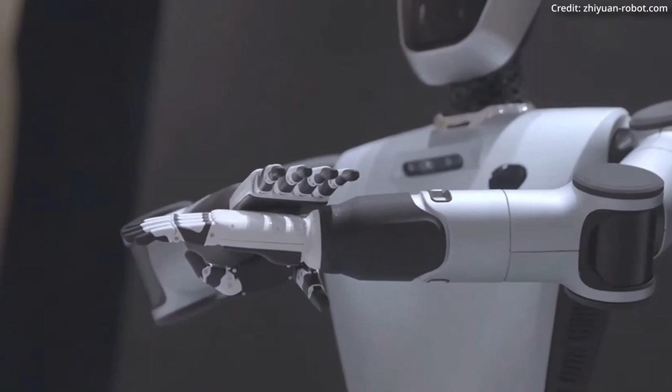In a robotics breakthrough, Chinese company AGI-Bot has unveiled RAISE A1, an advanced humanoid robot that's bringing us closer to generally intelligent android assistants. These machines aren't just aesthetically human-like, but they also boast capabilities that could revolutionize how robots and humans interact.

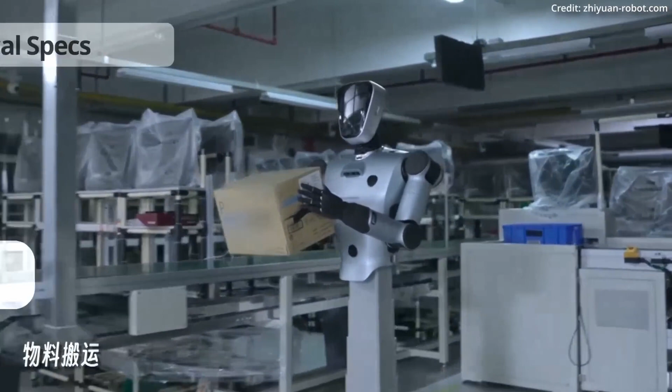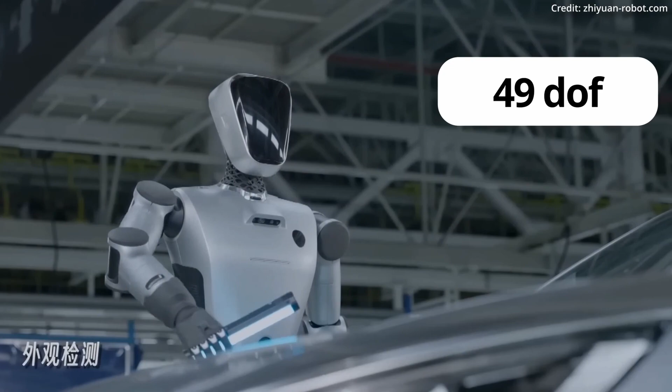At 175 centimeters tall with a weight of 55 kilograms, RAISE A1 cuts an impressively lifelike figure, but even more impressive is its robotic musculature. With an incredible 49 degrees of freedom, it can potentially mimic the fluidity of human movement better than any android before it. And it's not slow either, as the RAISE A1 can walk bipedally at over 7 kilometers per hour.

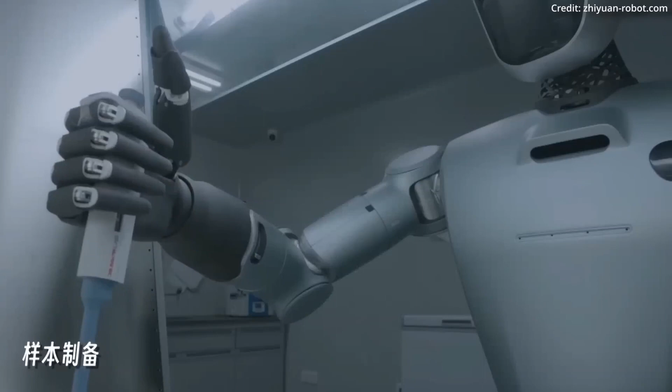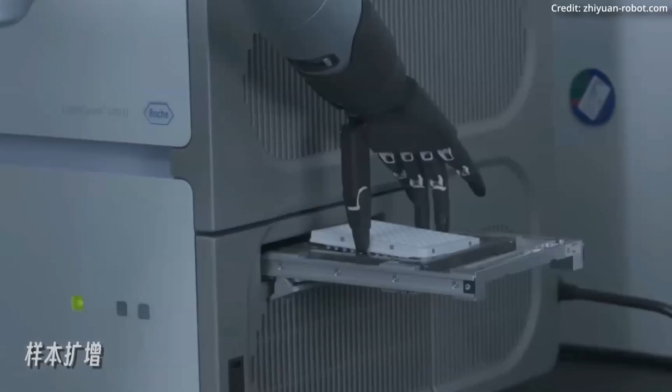While lifting 5-kilogram loads, what truly separates this robot from the pack, however, is its next-generation artificial intelligence. While remaining tight-lipped on specifics, AGI-Bot has strongly hinted that RAISE A1 leverages several massive language models with tens of billions of parameters. This cutting-edge AI allows it to understand and communicate with human-level eloquence while tackling cognitive tasks with ease.

The researchers say they've unified the latest advances in robotics and AI to create an android that's markedly closer to the intelligent machines of science fiction, including innovative hardware like the liquid-cooled PowerFlow actuators, enabling the robot's impressive agility.

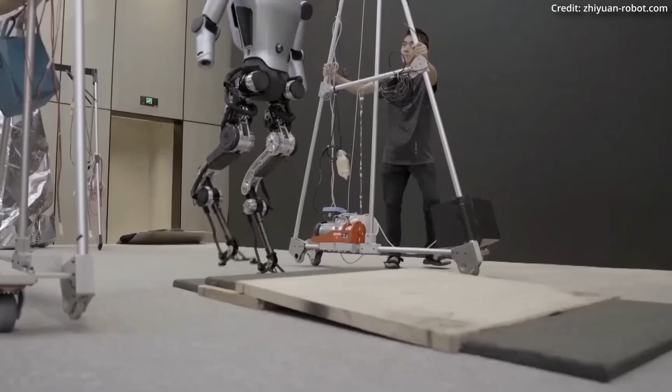But RAISE-A1's true potential may also lie in its modular design, as this versatile android can hot-swap components like hands, wheels, or legs for totally different use cases, including assembling other robots, aiding the elderly, or even babysitting. And with this kind of modular flexibility, it could finally make human-robot interaction affordable and ubiquitous.

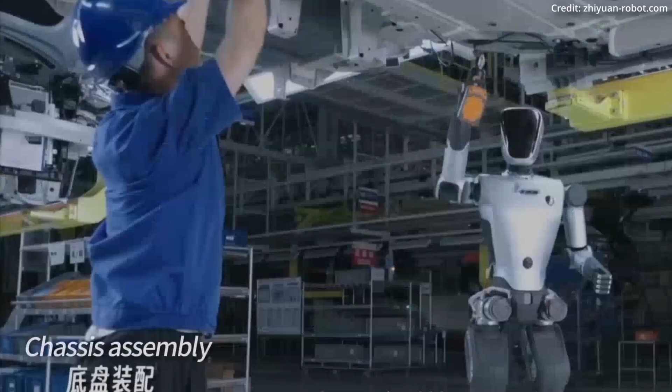Furthermore, AGI-Bot has bold plans to commercialize RAISE-A1 by the end of this year, first in industrial manufacturing, before potentially introducing it as a home assistant or robot valet. And if they deliver, it could be the turning point that brings humanoid robots out of scientific labs or test settings and into our everyday lives.

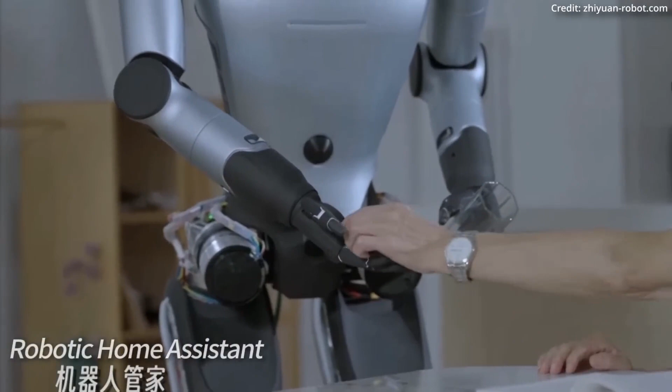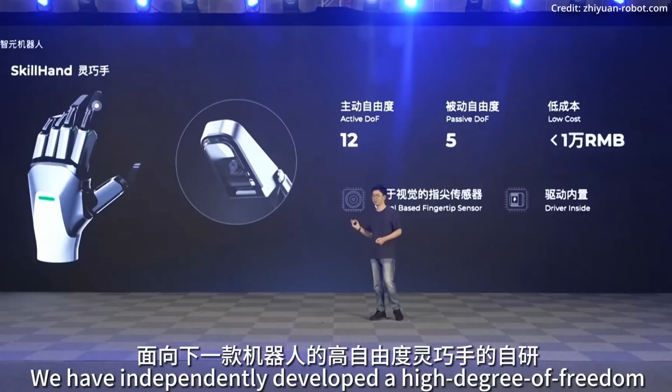Another key innovation allowing an even wider array of versatile use cases is RAISE-A1's modular SkillHand system. This dexterous robotic hand packs 12 active degrees of freedom and 5 passive ones, with built-in vision sensors for precision manipulation. Yet it costs less than 10,000 yuan, making it affordable enough to be a standard accessory across AGI-Bot's robot lineup.

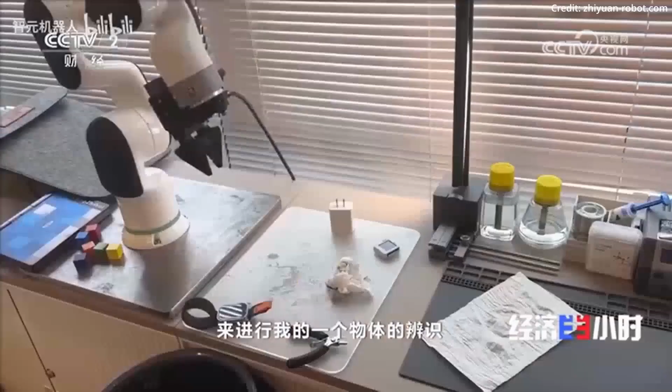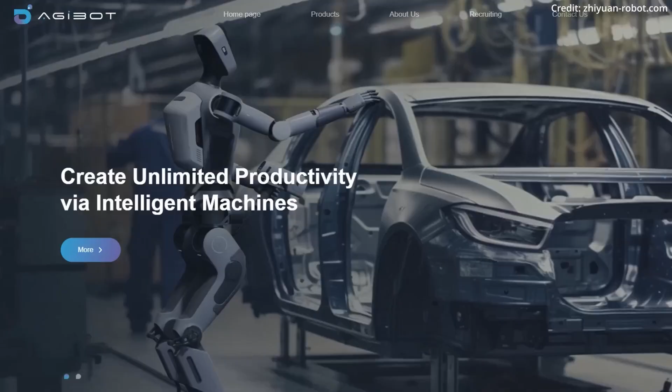But SkillHand's modularity is its true game-changer, with RAISE-A1 being able to autonomously swap out its hand for specialized tools like screwdrivers on the fly. This customizability epitomizes AGI-Bot's modular design philosophy, allowing their robots to morph between bipedal, wheeled, and other forms seamlessly.

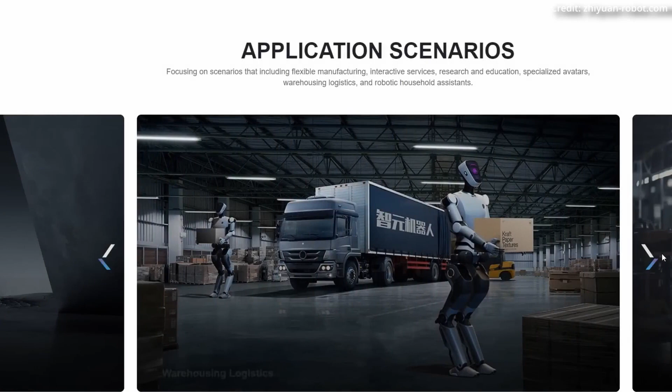But most important is the robot's AGI-ROS system, which is AGI-Bot's unified robot operating system that adheres to principles like lightweight deployment and high scalability, while also providing multilingual interfaces to support major robotic frameworks like ROS. And even more exciting is its soon-to-be open sourcing for community development.

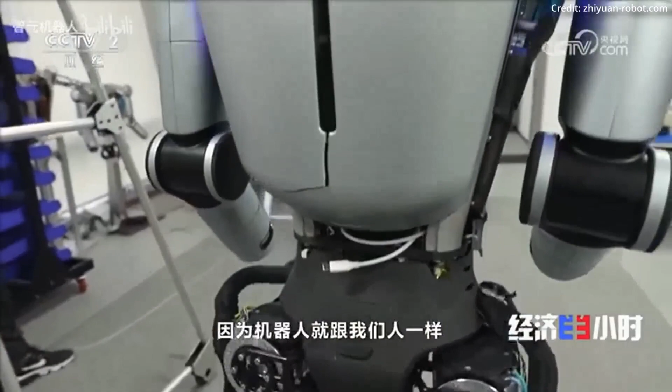However, AGI-Bot understands that advanced hardware and software are just one piece of the puzzle, as the true key to unlocking a robotic revolution lies in its other artificial intelligence models. To this end, AGI-Bot is betting big on enormous language models, with job listings for engineers specializing in systems with tens of billions of parameters.

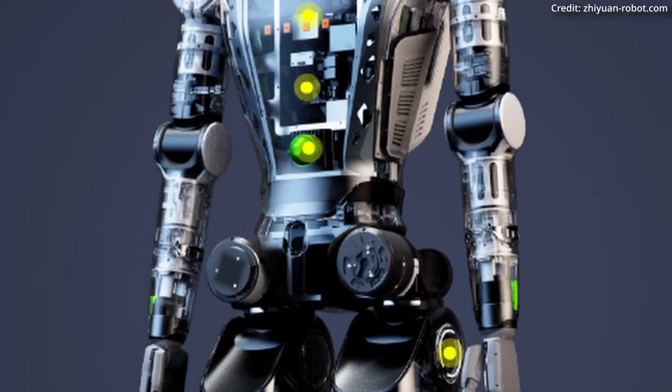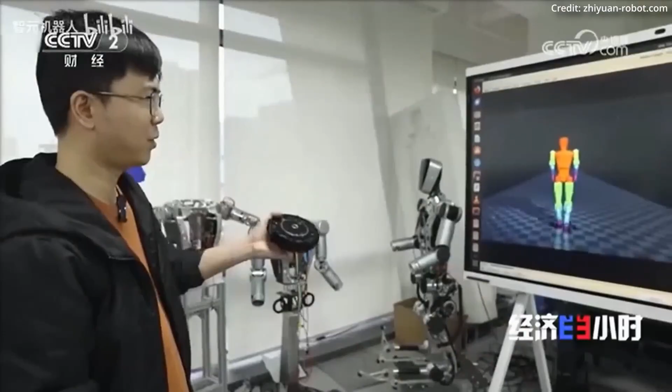Their aim: fusing this cutting-edge natural language AI with robotics to create intelligent, communicative machines that can understand and interact with humans more intuitively. The company sees this union of language models and robotics as an inflection point that will finally allow robots to break free of their industrial shackles and integrate into everyday life.

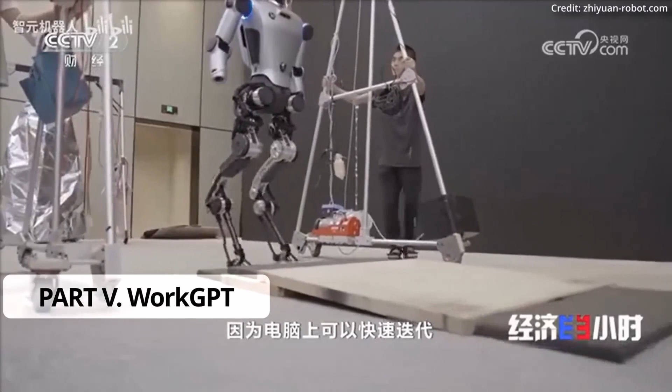And as other big players also invest in android intelligence, the race is on to birth the world's first truly intelligent robot assistant. Furthermore, there's another breakthrough that's underpinning RAISE A1's unprecedented capabilities called the WorkGPT AI system.

By combining breakthroughs in large language models and visual language models, WorkGPT allows RAISE A1 to perceive its environment, comprehend instructions, and autonomously plan actions, allowing it to serve as much more in the near future.

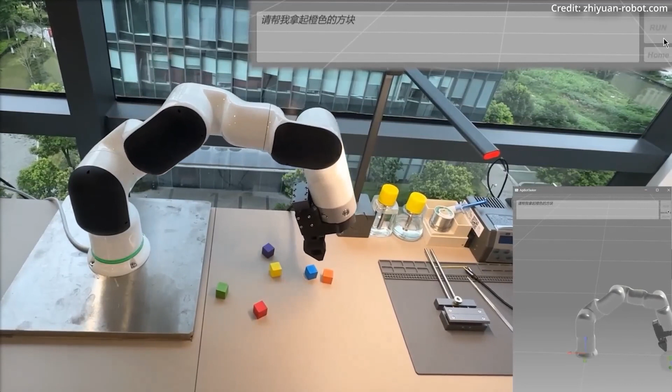And WorkGPT itself is a towering achievement as a language model with tens of billions of parameters that's trained on a vast knowledge base. But unlike typical AI, WorkGPT leverages its capabilities for more of a general kind of intelligence.

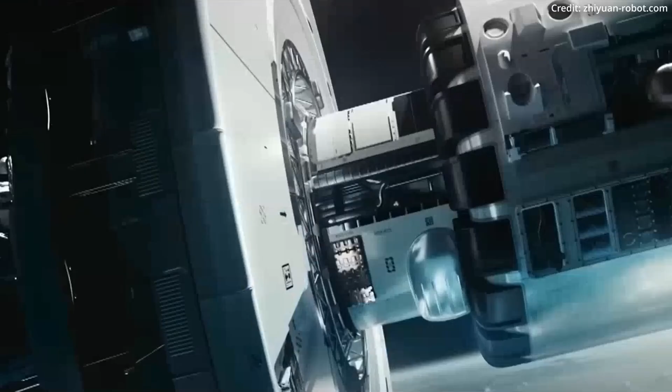In fact, it can even identify objects and concepts without explicit training data by reasoning through complex multi-step operations via what's known as chain of thought. Simply put, WorkGPT gives RAISE A1 powerful comprehension and problem-solving skills that are nearing human cognition.

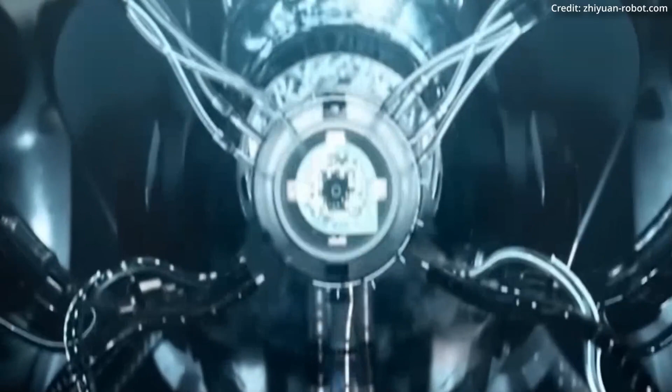And orchestrating these abilities is AGI-Bot's innovative architecture, which is referred to as AI Brain. In terms of its most important duties, it provides robotic intelligence in a cloud-based approach for abstract reasoning, an on-device inside brain for skills and decisions, a sort of cerebellum for choreographing motor commands, and a kind of brainstem tasked with handling low-level hardware control.

Altogether, this hierarchical approach allows RAISE A1 to dynamically allocate tasks between local and cloud processing for optimal performance. Furthermore, AI Brain defines a library of meta-skills that allow the robot to autonomously plan and schedule operations within certain domains. As that skill repository grows, the robot's capabilities will expand exponentially across thousands of industries.

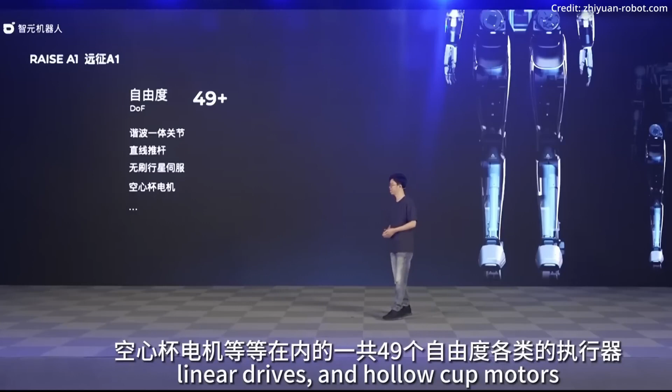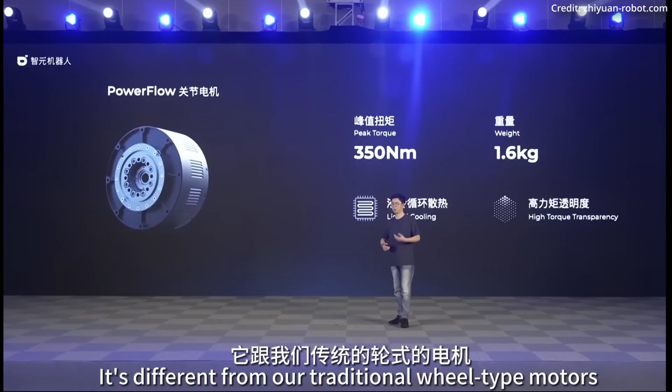Complementing that adaptable AI is RAISE A1's reconfigurable hardware design. Its upper limbs can hot-swap tailored end effectors for different tasks, while lower configurations switch between bipedal, wheeled, and hybrid modes. This versatility optimizes RAISE 1 for any scenario, from manufacturing duties to home assistance and more.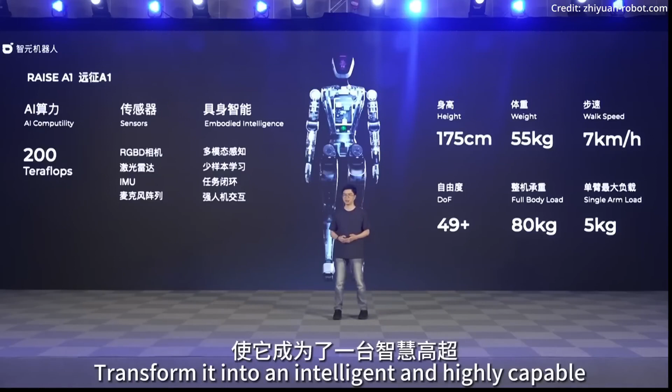AGI-Bot is already collaborating with major industrial partners to deploy RAISE A1 robots. By opening development tools, cloud platforms, and collaboration models, AGI-Bot aims to cultivate an ecosystem where creators can expand RAISE A1's skills and push it into new frontiers.

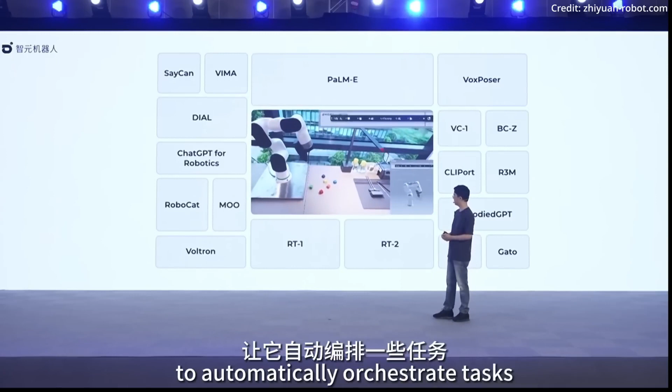For decades, the AI and robotics communities have pursued integrating general intelligence with embodied, physical systems. And if AGI-Bot's moonshot technologies live up to their promise, RAISE A1 might be the beginning of a pivotal breakthrough that helps to finally unleash intelligent, adaptive robots into the real world at scale.

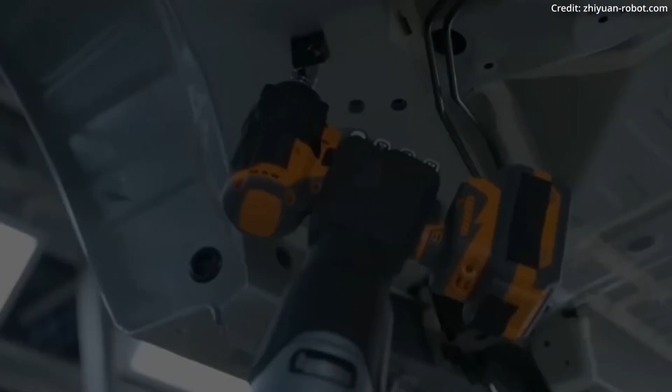More importantly, though, while RAISE A1 represents the cutting edge of AI and robotics, AGI-Bot understands the real challenge lies in proliferating their revolutionary android across industries and homes. Their strategy? An ambitious ecosystem play catalyzing a community-driven robotic renaissance.

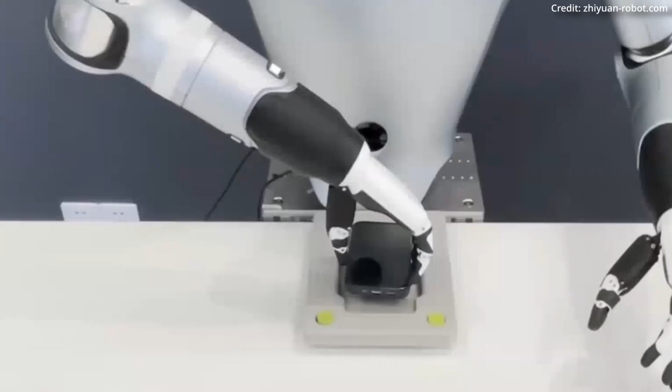The groundwork has already begun through strategic partnerships with leading manufacturers. RAISE A1 prototypes are being piloted in various real-world production scenarios under these collaborations.

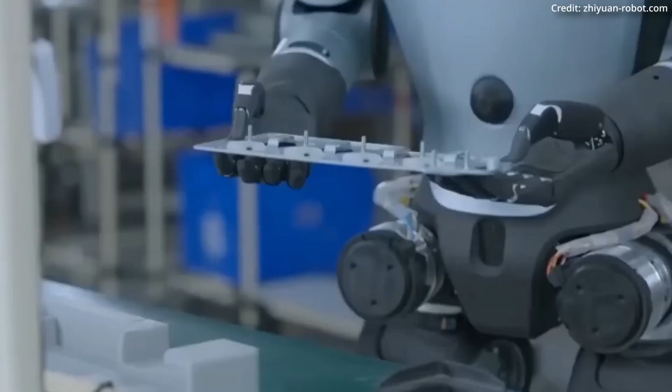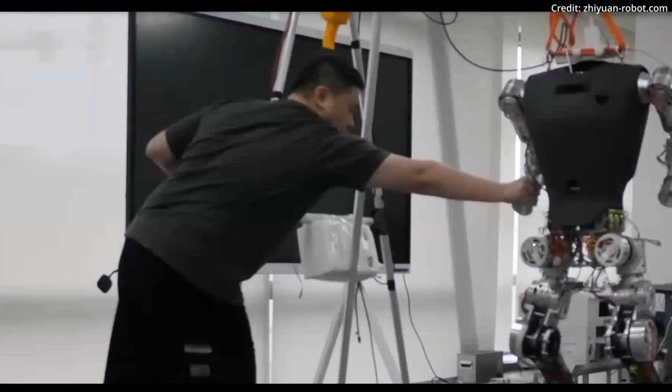But AGI-Bot recognizes this is just the first step. Over the next few years, they plan an aggressive push to deploy RAISE A1 androids across diverse commercial and consumer domains far beyond factories. From healthcare facilities to construction sites, restaurants to research labs, no sector will be off-limits as AGI-Bot seeks to inject their intelligent robotics into every walk of life.

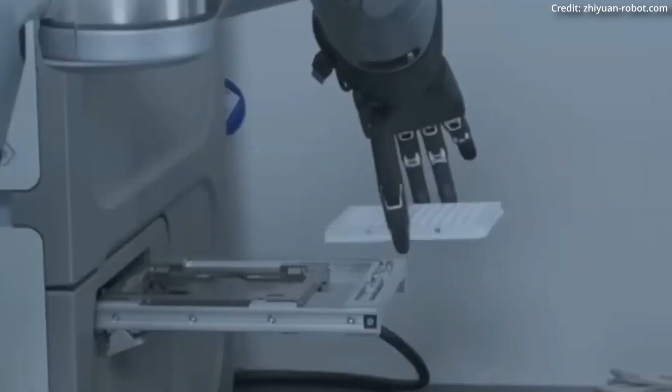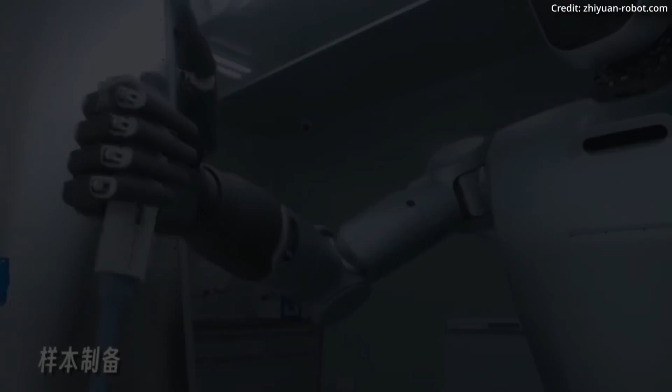But it still remains uncertain as to whether AGI-Bot has the stamina and speed to keep up with its competitors, as its pace of updates on the Humanoid have recently begun slowing down in comparison to the likes of Tesla, Figure, Apptronik, and others.